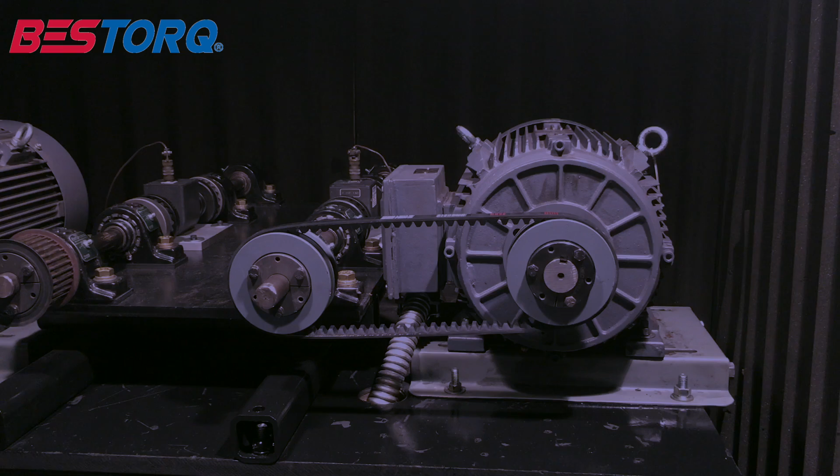However, there still is a wide range of tension at which a belt and bearings will operate satisfactorily. It is critical to understand that tension loss occurs on all manufacturers' belts. The highest quality belts will lose nearly 50% of installed tension, while lower quality belts lose over 70% of installed tension. Most of the tension loss occurs in the first hour and day of running. You will need to install a belt such that it retains enough tension to provide long-lasting, trouble-free operation.

You cannot feel the correct tension on a V-belt. All belts do not feel the same when properly tensioned, due to different materials and tension cables used in their manufacturing process. On a test given to 250 experienced maintenance personnel, only 2 of the 250 tensioned a belt correctly using the feel method. Many were as low as 7% of the proper tension. To accurately tension V-belt drives, the most widely used and a simple method is the force deflection method, which we are now going to demonstrate.

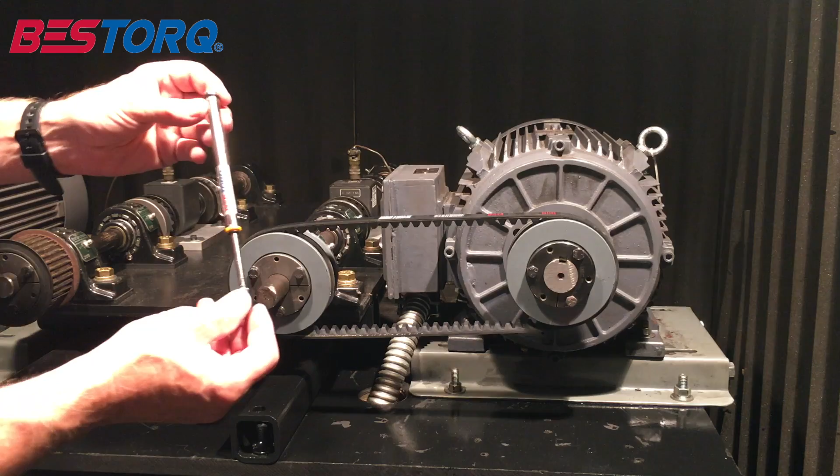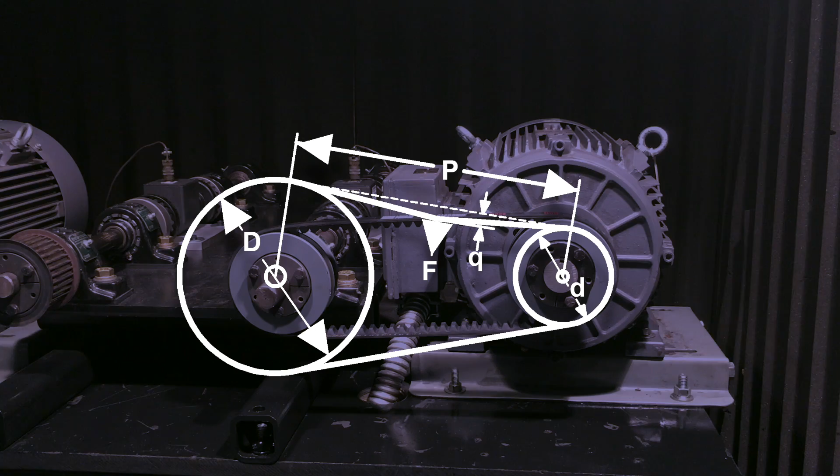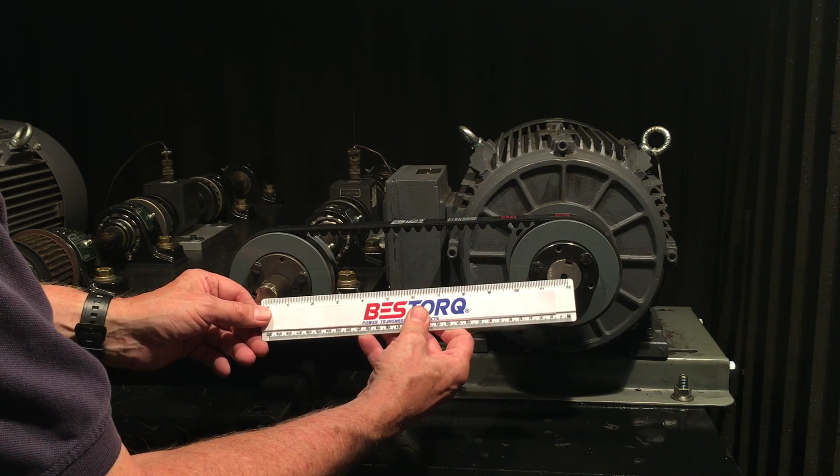You will need a tool such as a Bestorq tension pencil to simply measure the force and to deflect the mid-span of the belt a given amount. First, we need to determine the 2 numbers we need to use the tool, P and q, on this diagram. Measure the span length of the belt P, which is the distance from where the belt touches one pulley to where it touches a second pulley, or roughly the center-to-center distance of the 2 shafts. In this demonstration, it is 12 inches.

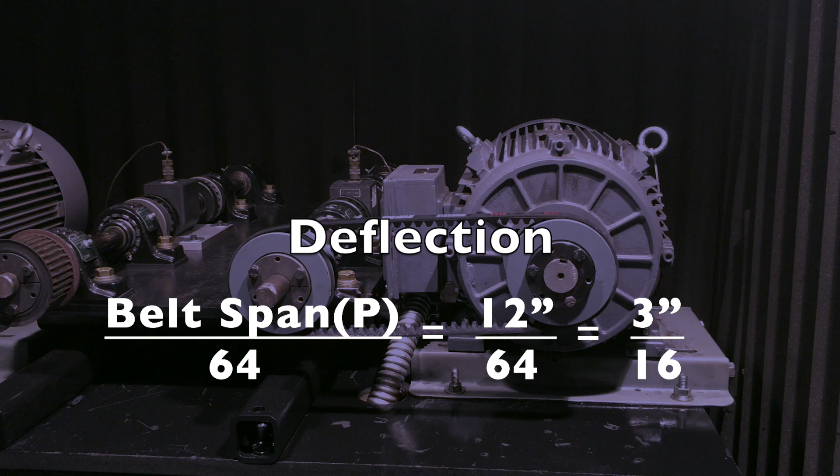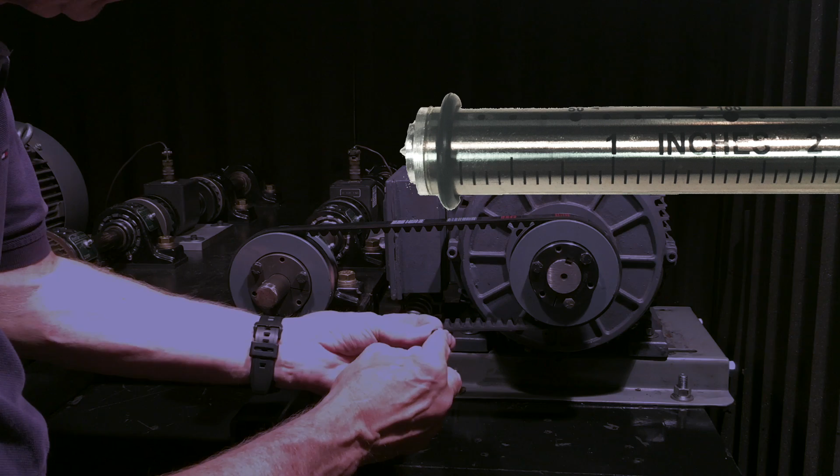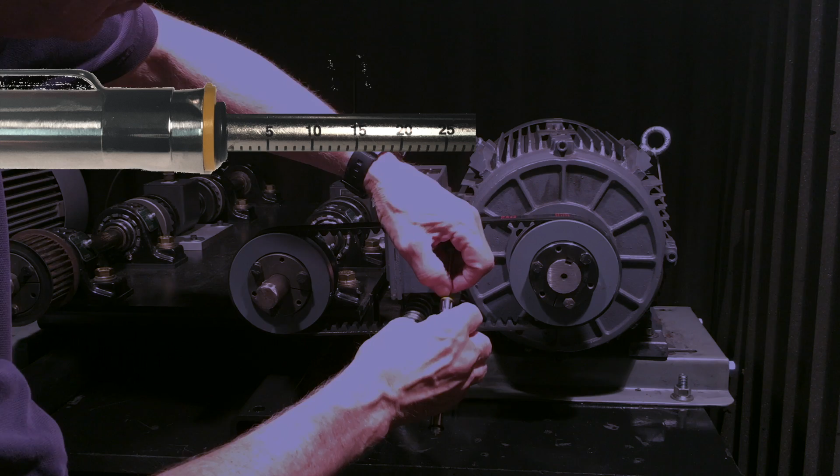This span length in inches is put into this simple equation to determine the amount of deflection. You deflect the belt 1/64th of an inch for every inch of span. In this case, it is 12/64ths of an inch, which is simplified to 3/16ths of an inch. Next, you need to set the deflection distance q, in this example 3/16ths of an inch, on the tension pencil O-ring by sliding the O-ring on the body of the tension pencil. Then you need to set the second O-ring to its 0 position on the pound scale on the plunger by sliding the O-ring down the plunger until it touches the yellow stop ring.

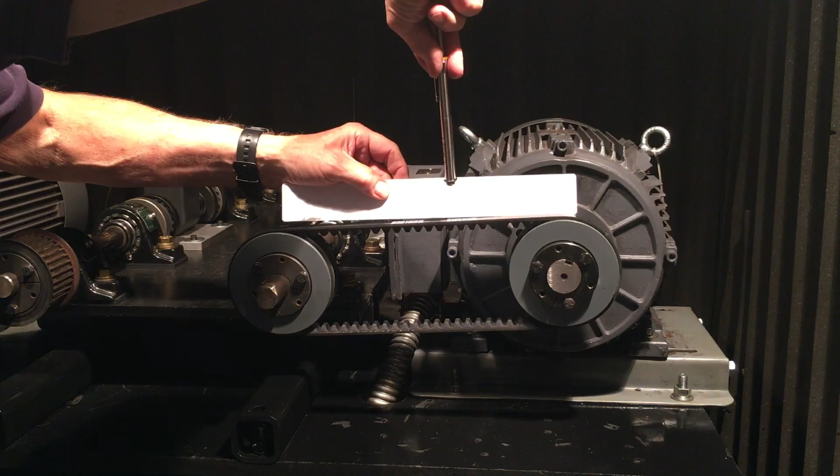Then we'll demonstrate taking a reading on a single belt drive. To obtain this reading, you will need to place a straight edge across the top of the belt. Place a tension pencil in the center of the span of the belt and slowly push down on the rubber knob on the tension pencil until the O-ring is lined up with the edge of the straight edge. Now that we have deflected the belt the recommended amount, the top O-ring will have moved up the plunger, and that shows us the amount of force used. In this case, we have a measurement of 11 pounds.

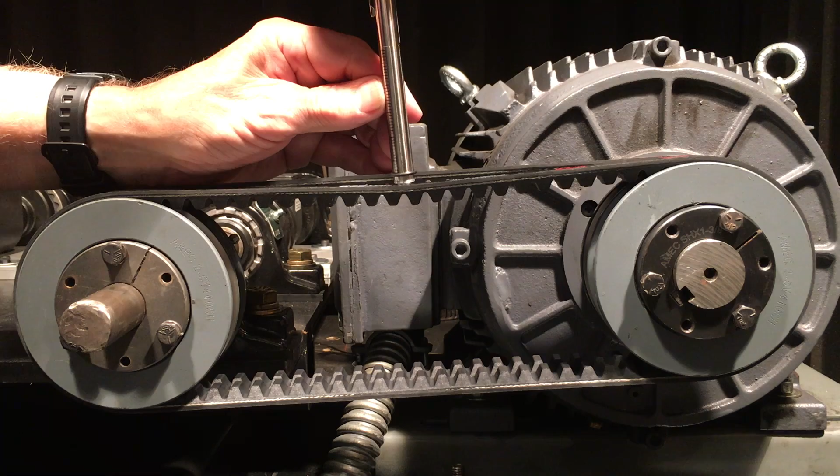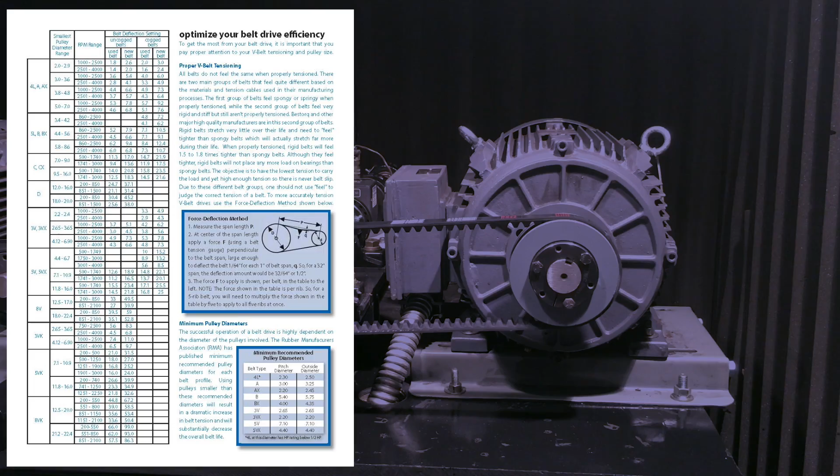If you have a multiple belt drive, you will only need to tension the loosest belt. You will need to simply deflect the belt until the O-ring is in line with the top of the adjacent belt. The belts will need to be somewhat tight already to ensure that the adjacent belt is straight between the 2 sheaves. We need to compare this reading to the deflection force charts. These can be found in the Bestorq Installation and Maintenance Guide, Product Information Brochure, and specific Bestorq tensioning flyers. This information can also be found online at www.bestorq.com under Belt Installation and Maintenance.

To find the correct deflection force on the chart, you will need 5 pieces of information. First, we are using BX belts. Second, the smaller outside diameter is 4.4 inches. Third, the speed is 3550 RPM. Fourth, we are using Bestorq cog belts. Fifth, these are new belts. Using the information, the deflection force should be around 9.1 pounds.

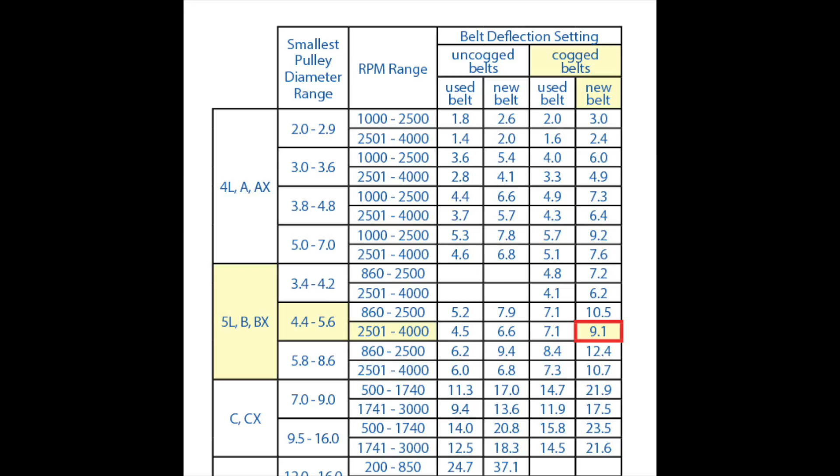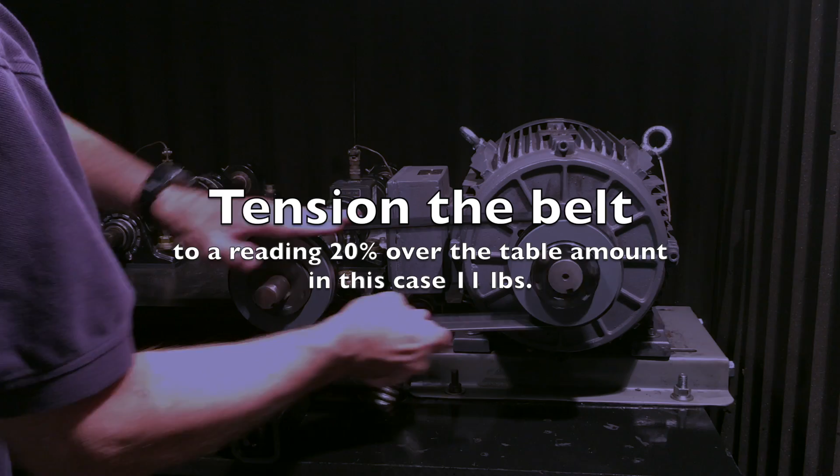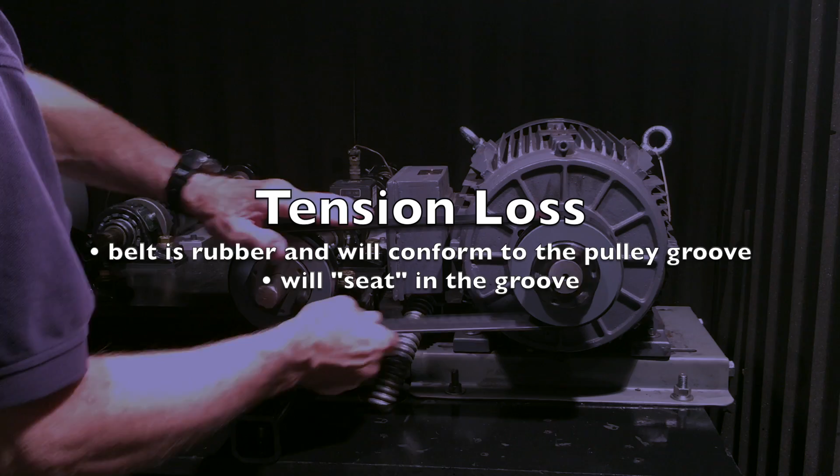We have 11 pounds. The belt will lose the installed tension in a very short period of time, normally in the first 10 revolutions. The tension will decrease 10 to 20% depending on the belt type and drive conditions. Optimally, you would tension the belt to a reading 20% over the table amount, in this case 11 pounds, realizing if you do this you will not need to come back to retension. The loss is due to the simple fact the belt is made of rubber and it will conform to the pulley groove and seat in the groove. The tension will continue to decrease for the life of the drive due to seating in and belt wear, eventually declining to 40–50% of the installed tension.

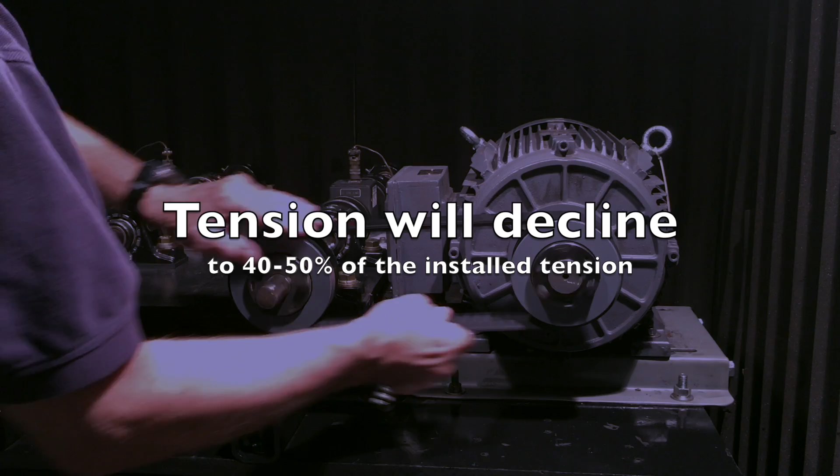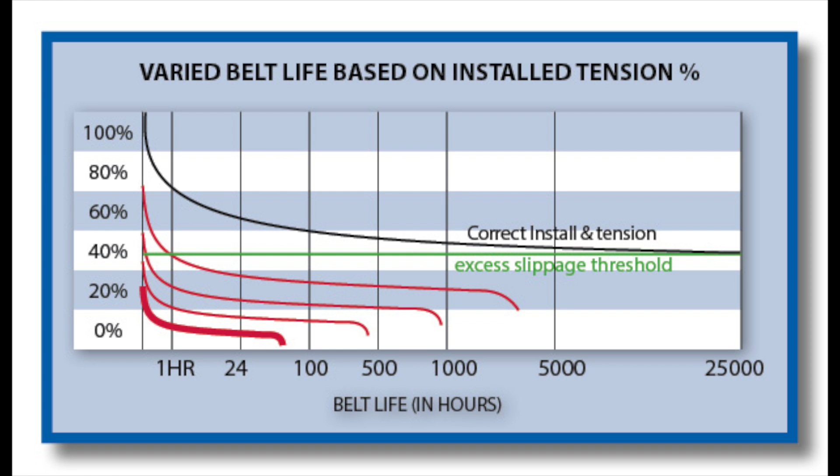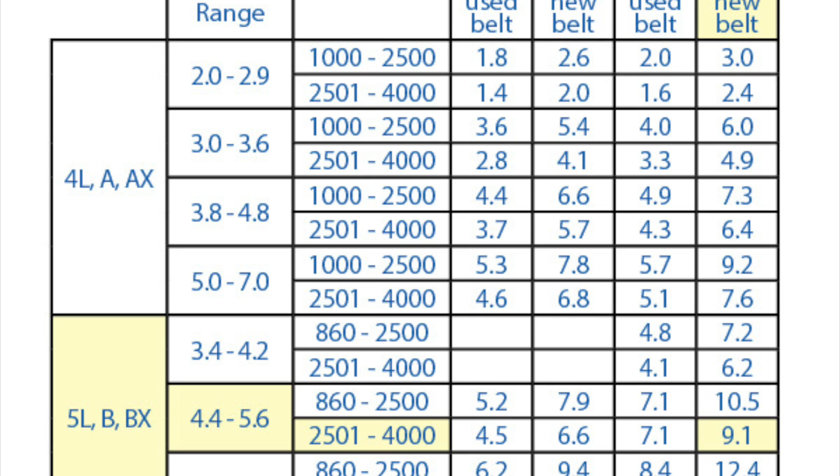Belt life varies greatly depending on how the belt is tensioned at installation. When installed at 100% of the correct tension, the belt life will be extremely good. Looking at the graph, you can see that when the tension is only 20% at installation, the belt life can be very low. If you choose to install the belt to the exact amount as in the table or a little less, it is recommended to come back in 1 hour and also at 24 hours to check the tension and set it to the force shown for a new belt.

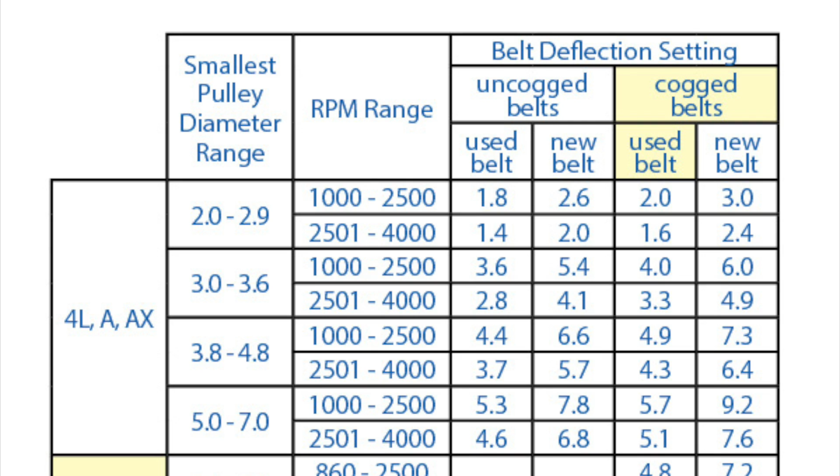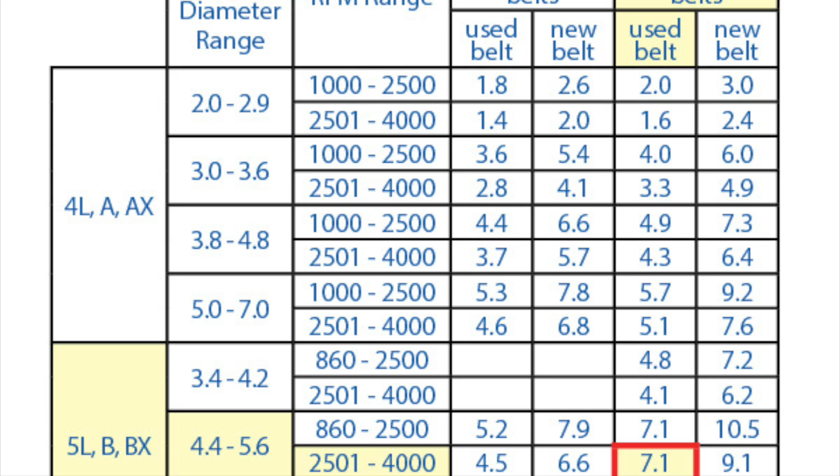If the elapsed time is 48 hours of running or more, use the amount shown for a used belt, realizing that a reading over by up to 25% is acceptable. A reading of less than shown for a used belt will lead to belt slip and lowered belt and bearing life. At each preventive maintenance interval, if the belt tension is checked, it should be at the used belt force or up to 25% above.

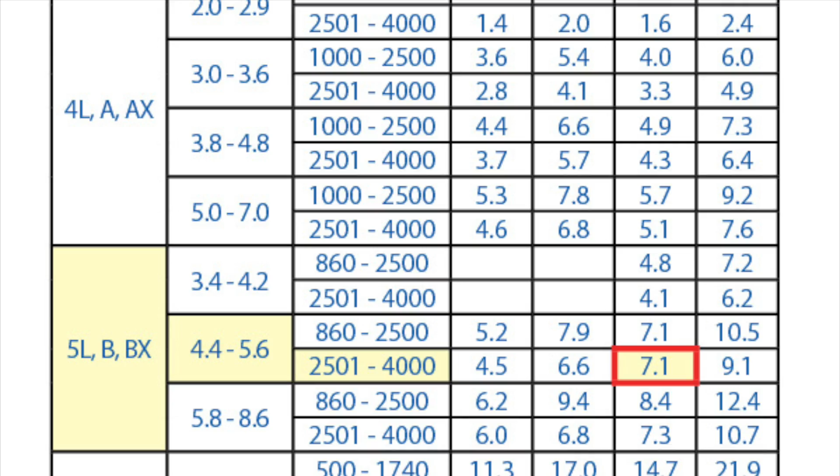Belt tensioning also affects bearing life. When a belt is loose, it will slip, causing excess heat. This leads to hot bearings and lowered belt life. Installing at the optimum tension will keep belts from slipping. Bearings are also designed for this load. The bearings will actually run cooler and longer due to the lower heat buildup from belt slip. We have performed repeated trials to verify this fact.

In a typical trial, the bearing temperature was 124 degrees Fahrenheit at the recommended installation tension. Even when the belt was initially tensioned to 3 times the recommended amount, the bearing temperature remained at 124 degrees Fahrenheit. Note that when the belt was installed loose and started to slip, even just a small amount, the bearing temperature rose quickly. At 5% slip, the bearing temperature had risen to 178 degrees Fahrenheit.